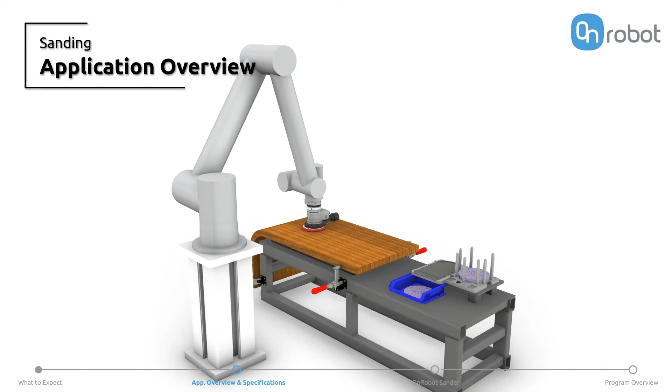In this video, we will take a closer look at what is important to consider to successfully deploy a robotic sanding application. Robots are ideal for sanding operations as they provide great consistency and precision. When paired with the right hardware and software tools, the robot's trajectory, speed, and force can be precisely controlled to increase the overall quality of the process and obtain repeatable results.

There are many different sanding techniques and tools available, but random orbital sanders are commonly used in the industry because they are efficient, easy to use, and leave less visible scratch patterns or swirl marks due to the randomness of their movement. This guide will mainly focus on them.

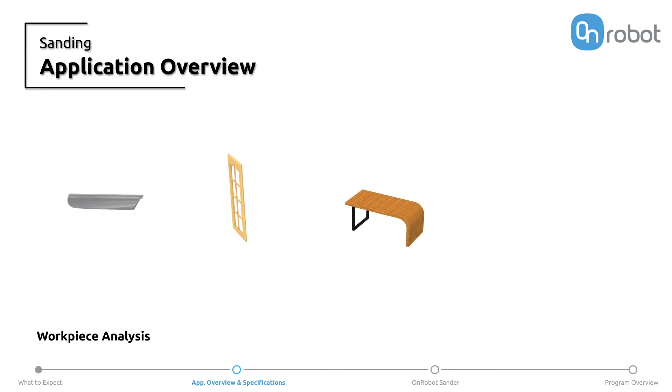The first step before deploying a robotic sanding application is to completely analyze the workpiece that needs to be processed. Other than the size and shape, it is important to consider the material composition of it, and if the surfaces are flat, curved, or uneven, as this will dictate the required sanding technique and abrasive media that needs to be used. There is no standard or convention to follow to perform a sanding operation. It all depends on personal preferences, experience, and on the desired surface finish.

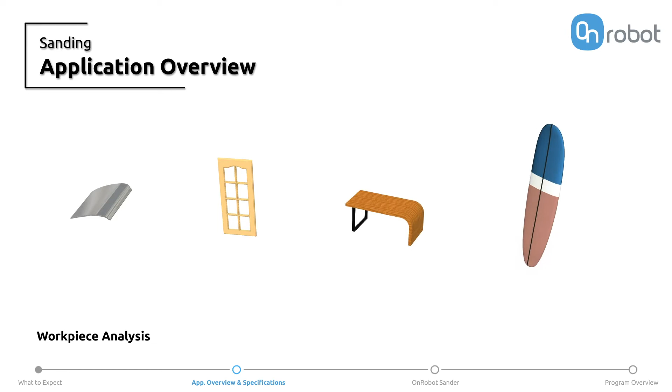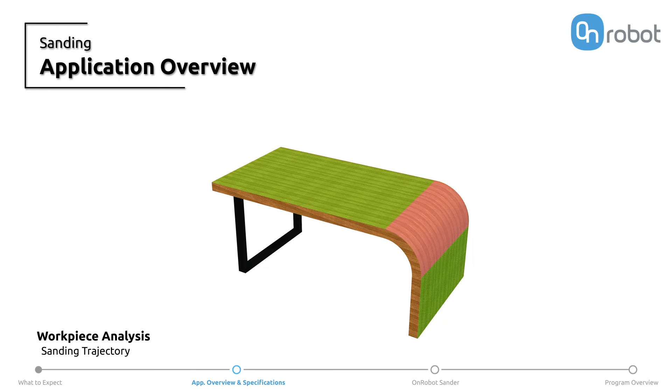To better understand what we should consider, let's use the following wooden coffee table as an example. This workpiece has three surfaces that need to be sanded: a horizontal, a vertical, and a curved surface connecting both. Following the manual process to obtain the desired finish, the robot's sanding motion must be parallel to the wood grain at a constant speed of 25 mm per second.

It is also important to apply just enough force to let the sanding tool do its job. Too much force will slow down the sander, create scratches, and decrease the life of the abrasive used. For this workpiece, we will need a robot to apply a force of 15 newtons.

To ensure that the robot applies the desired force while following the trajectory, it is recommended to use a force-torque sensor. Such a sensor is necessary when there could be some differences between the workpieces and the robot needs to adapt to the surface's contour in real time. Using a force-torque sensor will also ensure distributing the sanding pressure evenly to maintain a level surface.

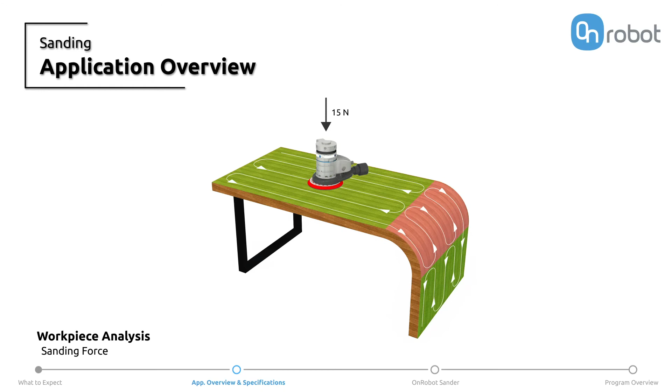The initial condition of the workpiece will determine what type of abrasives should be used. The roughness of sandpapers and abrasives are rated by a grit number. The higher the grit number, the finer the abrasive will be. To better understand this difference, let's look at a representation of what the cross-section of different grits of sandpaper look like. Remember to always start the sanding process with a coarse enough sandpaper grit to remove the imperfections quickly.

Then continue using finer grits to remove the scratches from the previous one used. The final grit will bring the surface to the desired smoothness. There is no fixed rule for how to progress through the grits, but it is important to avoid skipping a grit, as a coarse one could leave deep scratches that successive finer grits might not be able to remove.

Keep in mind that different organizations around the world have developed their own grit numbering systems. They all follow a similar convention for classifying the grits in ascending order, with the lowest number being the coarsest and the highest number being the finest. Although the grit number could be the same between the different systems, their roughness will not necessarily be equivalent. Always consider which system your sandpaper manufacturer is using to avoid unwanted results.

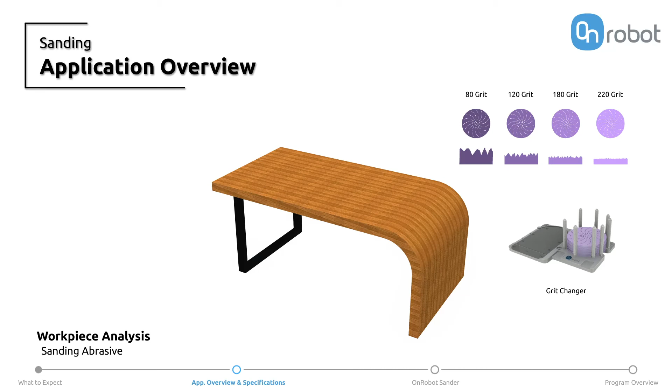It is also recommended to use a grit changer for the robot to automatically change the sander's grits, as this will optimize the application's cycle time and avoid the need for the operator to constantly change the grits between sanding operations. It is important to consider how the workpiece will be presented to the robot and how it will be secured.

The robot should also be mounted at a position where it will be capable of reaching the complete surface without overstretching, as this could create a high torque on the arm and introduce vibrations that will negatively impact the surface finish and the robot arm.

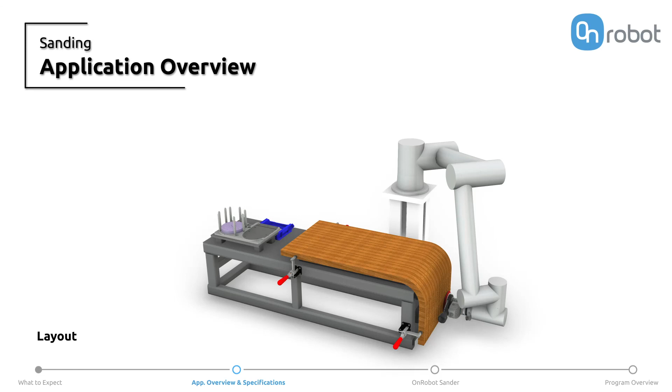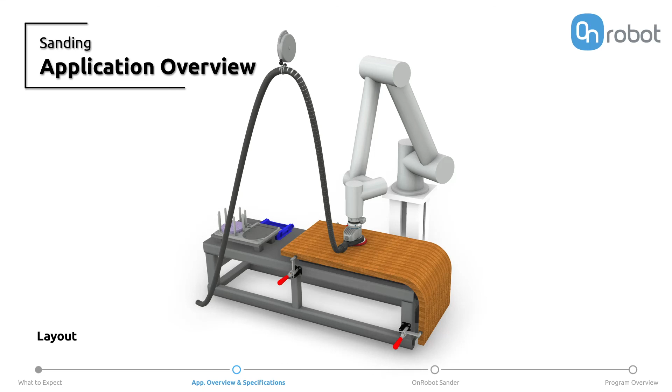Ensure that the vacuum hose is fully secured and won't become tangled, as this could disconnect it and cause a hazard. If, while sanding the workpiece, any of the robot joints are expected to rotate considerably, it would be advisable to use a spring balancer to hold the vacuum hose rather than secure it around the arm. Regardless of how the vacuum hose is attached, avoid having it pull the arm with great force, as this could negatively affect how the robot follows and conforms to the contour of the surface.